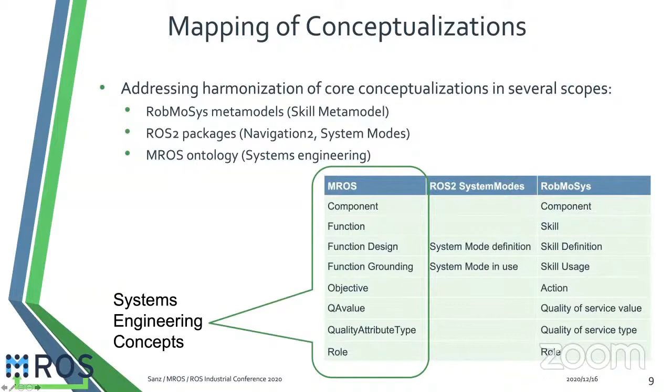Another part deals with the system, that in our case is a navigation system in ROS-2. And one part was the meta-control domain, the intermediate capability that provided the runtime adaptation needed to match the concrete realization of the system at runtime to the needs for the mission and the tasks to be performed.

Our framework provides several capabilities concerning concrete application, in our case navigation capabilities, also related to capabilities for system generation and adaptation at runtime, capabilities for runtime observation of system state and diagnosis, and capabilities for runtime adaptation and control of the realization of a concrete implementation.

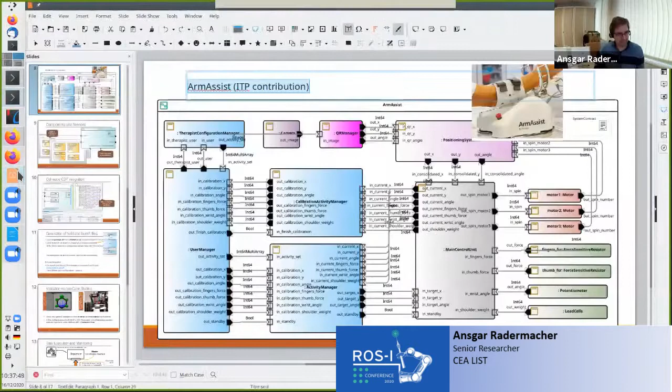Yes, thank you for the introduction. So I'm now sharing. Can you see my presentation? Perfect. Yes, so thank you for the introduction again.

So I will talk here about Papyrus for robotics, and the work presented here is principally the work of the CEA RobMoSys team, consisting also of Matteo, who will also present parts today, and Huascar Espinoza, and myself.

So why are we doing model-driven engineering? We are doing it because we observe that robotic software engineering is still, in many cases, a kind of craft. It's a bit less systematic and more ad hoc than in other domains.

And there are different incompatible component-based frameworks. With ROS, we are already a big step forward towards a framework that is very widely used. But there is still also a code-centric approach, so you're coding, you have some description files, but most parts of the application are still coded. And if different people are involved having different skills, there are no clear interfaces defined between these people.

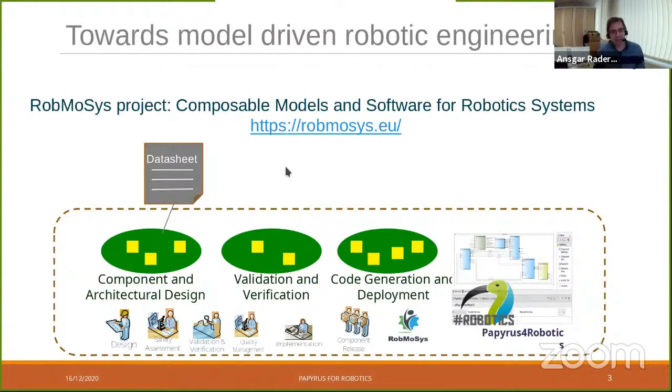And in order to really have something that runs in the end, you also need some code generation and deployment mechanisms. That is why we started to work on Papyrus for robotics. By the way, this work has already been supported by a ROSIN project called ROS-MDD, a focused technical project of ROSIN that enabled us to add ROS2 code generation to Papyrus for robotics. So what is Papyrus and Papyrus for robotics?

Some of you may already know Papyrus, which is an open source model-based engineering tool. It's integrated into Eclipse and it's based on standards, so we don't have proprietary non-compatible extensions, but a pure OMG UML standard and some OMG standardized extensions such as MARTE. But it is possible to customize the tool to address domain-specific concerns.

And that is what we have done with Papyrus for robotics. We did a customization for the robotics domain, aligned it with RobMoSys with respect to the modeling artifacts, and added tools for code generation that address specifically ROS tools. We also have some support for design time assessment of certain criteria, so you can specify some safety concerns and validate that.

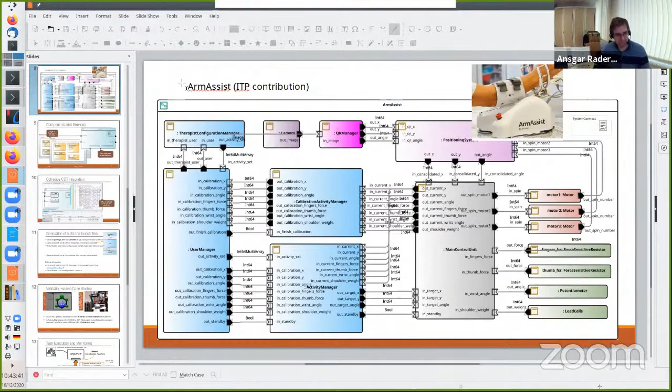We see your editing view now. Yeah, somehow dropped out of full screen. Okay, it's back in full screen. It's big. Don't know what happened.

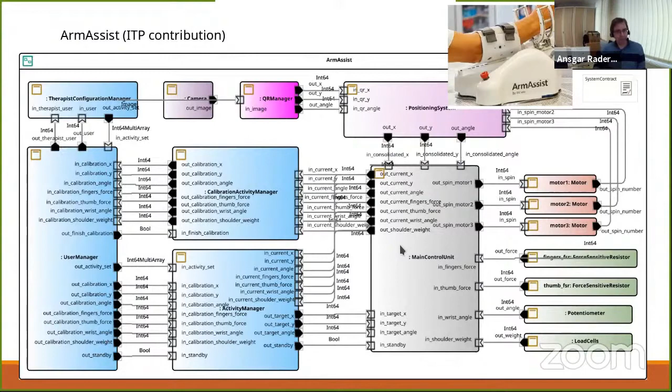This shows you that it's possible to also define some more complex systems with their tool, but I'm now returning to some very simple ones.

There's also a link with Eclipse CDT. So if you have modeled your component at one place at one moment, you need to write code that implements the callbacks, for instance, when you define here the port with the initial pose called initial pose that gets a pose and then needs to react on this pose information that it gets. So you need to write code at some moment, and we propose to do that with the CDT, the Eclipse integration of the C++ development tools.

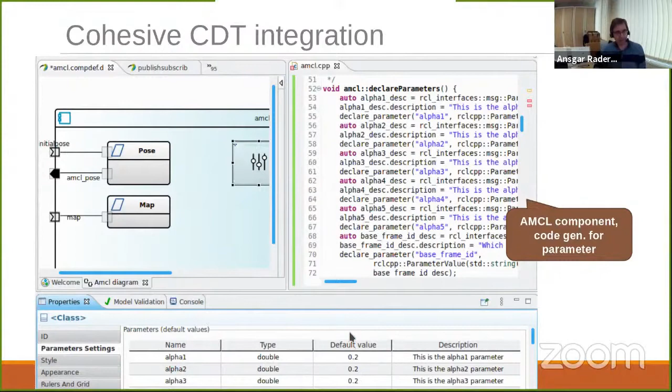For those that also want to change some of the model properties by editing the code, this is possible to some limited extent—you can, for instance, change the name or declare a parameter, and it will get updated in the model. If we have time, I can show that later on live.

We are not only generating code, but we are also generating the build files. So there is the package XML and the CMake list that you all know needs to be generated. We configure an Eclipse CDT project that is automatically configured for doing the Colcon build. We also generate launch scripts which contain suitable remappings.

Why is remapping needed? Because you might have some components that you are instantiating multiple times—for instance, a distance sensor, where you have two instances connecting to a controller, and you need to make sure that the information from the first instance goes to one port and that from the other distance sensor to another. So while we are reusing the same component, we need some reconfiguration through remappings to make sure the communication follows our model.

We also take care of parameter configuration. We generate YAML files in which a user can override some default parameter values specified on the model level. And for the generated launch script, we have generated a normal variant and one variant that automatically launches a component, which is quite useful for testing.

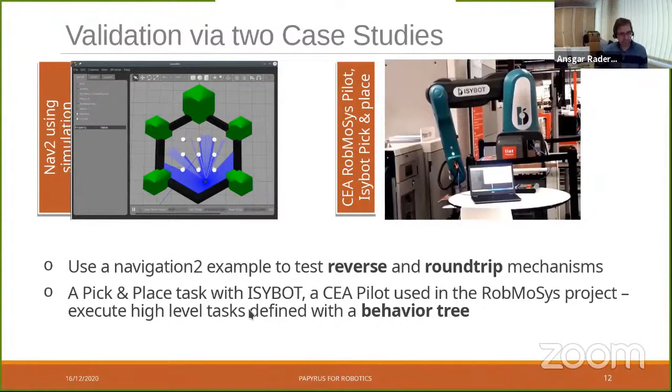In the context of ROS-MDE, we did a validation with two use cases. On one hand, we had a navigation use case which we executed in simulation. On the other, a pick and place application in which we used our ISYBOT. This was also a CEA pilot in the RobMoSys project. We had these two case studies to show that our reverse and round trip mechanisms work. With respect to the pick and place task, we particularly developed and evaluated the execution of a behavior tree.

So Matteo, I don't know if you want to say some words about the task execution and monitoring with a behavior tree. No? Okay, we will do that later.

You have principally a sequencer that coordinates and executes the behavior tree, using a coordination interface to control one or more components which correspond to ROS 2 actions that get called by the sequencer. We will show a video using this mechanism, because one of the interesting aspects is that you can see how the behavior tree is executed, and in which state it is at a certain moment.

There's another interesting aspect: you can define a hazard and risk analysis table and associate it with tasks and skills. A skill of a robot, for instance to do a certain movement or to open or close a gripper, has potential risk, and we associate this risk with a skill. Then we automatically get a list of relevant skills when we define such a behavior tree. At the leaves of this behavior tree, we have these basic skills that are executed by a robot.

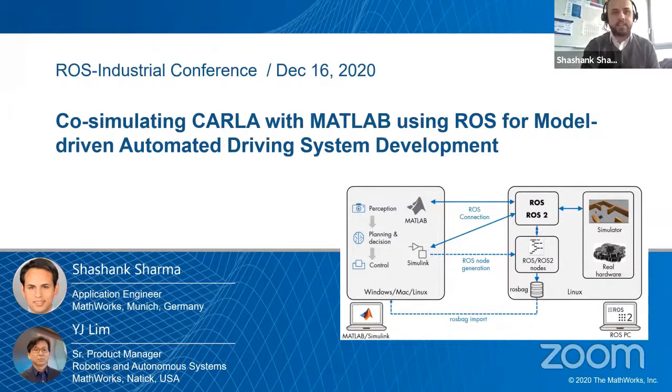Now let me start by talking about autonomous systems first. Autonomous systems may have a mix of multiple cycles of synchronous processing for more precision control, as well as asynchronous interfaces for communication of data and events for inter-process synchronization. Autonomous systems control may also require parallel or distributed processing, running on multi-core and GPU for high resolution and multi-rate sensor and perception processing, producing coordinated motion of multi-degree of freedom actuators. It's very complex. There have been several robotics frameworks proposing solutions to design and develop such distributed systems.

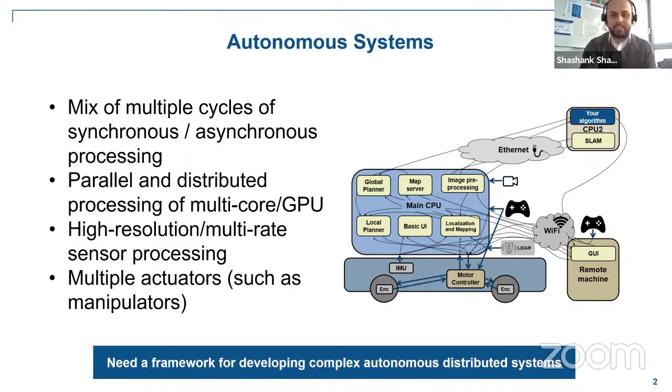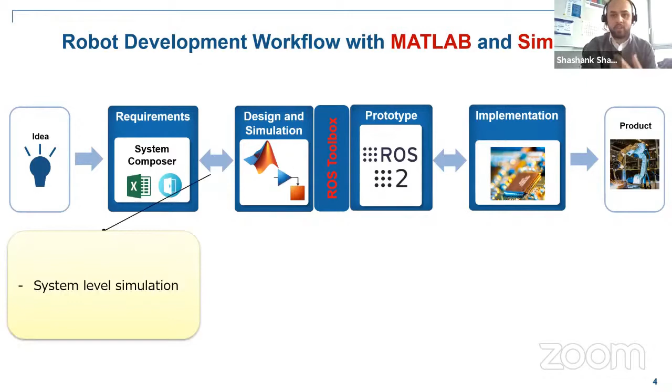Now, ROS is an enabling technology and quite popular one to develop such complex intelligent systems. With the given system design requirements, ROS provides a common framework to design, simulate, and prototype robotic applications. With ROS, you can also analyze log data, design algorithms with various handwritten codes, and visualize and debug your results. You may need to rewrite source code for production, though. By connecting Matlab and Simulink with ROS, it allows you to perform system-level simulation with requirement traceability. It also provides rapid and iterative design processes with many of the tools Matlab and Simulink has for autonomous systems. You can also generate certifiable code for production, not just C++ code. You can also, if needed, generate HDL code out of Matlab and Simulink for deployment on more energy friendly hardware resources. I will not delve into those details.

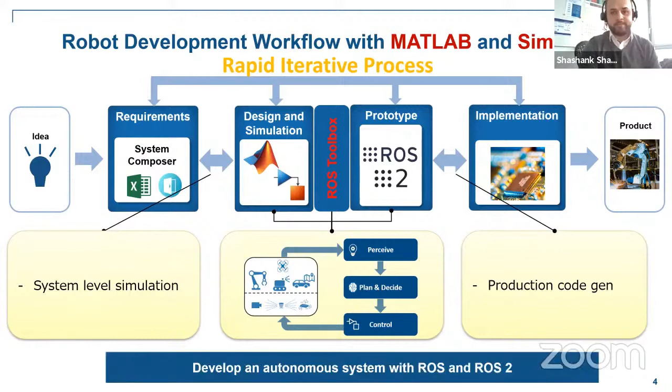Today's focus is how we bridge ROS with Matlab and Simulink for an application related to autonomous driving. Now let's see our agenda first. I will begin by giving a brief overview of ROS and ROS2 workflow with Matlab and Simulink. Then I will go into details about co-simulating Carla with Matlab and Simulink using ROS. I will talk about autonomous driving systems development in this context, and then briefly talk about what is possible beyond co-simulation and summarize our talk today.

Let's go into the first part, how the ROS and ROS2 workflows look in combination with Matlab and Simulink. Some of you might remember this was the core of my talk in last year's ROS Industrial Conference in Stuttgart, and today I'll give a brief one-slide summary of that topic. If you're interested in knowing more about these workflows, feel free to contact me. Alternatively, there's also a YouTube video from ROS Industrial from last year's conference. On the right-hand side, there's a traditional ROS-enabled system with a host of ROS-enabled simulators or hardware, and nodes that enable autonomy, visualization, and so on. On the left-hand side, Matlab and Simulink offer tools for autonomous systems development. Some of you might be familiar with our tools - Simulink, Stateflow, Matlab - used widely for such purposes. For autonomous systems development, systems should have functional components of sensing, perception, planning, and control. Now we have a tighter bridge to ROS from Matlab and Simulink. There are three workflows for how we can connect Matlab and Simulink to ROS.

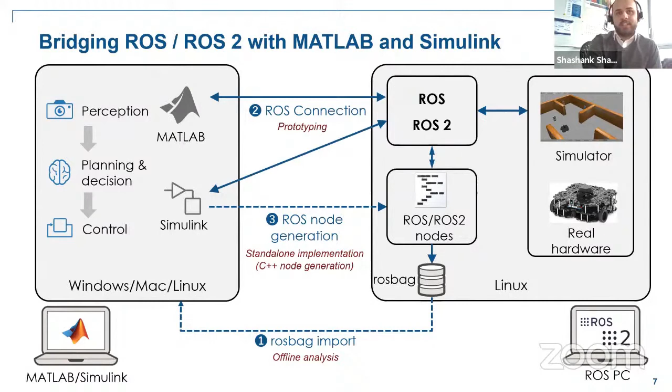Now, coming to my next topic, let me talk about how we can co-simulate Carla with Matlab using ROS. In this respect, let me first talk about 3D simulation for automated driving in particular.

As you know, autonomous driving is very similar but slightly more complex compared to, say, mobile robotics development. There's also a safety-critical factor involved and lots of regulations, plus interaction with vulnerable users such as pedestrians, cyclists, etc. So in order to test complex algorithms, there's a very strong need to virtually validate those scenes.

You also need to have an environment where you can realistically test and gain confidence in your algorithms before you go out into proving grounds or into real-world situations.

Such a 3D simulation requires modeling sensors, visualizing vehicles as well as other vulnerable road users. You can generate and record synthetic data and simulate scenes. There's also a need to programmatically create scenes and scenarios in order to cover a large solution space that might or might not be possible through real-world testing.

In this regard, MathWorks already offers a complete solution involving 3D simulation and modeling sensors. However, a lot of people working on these problems do not rely on a single tool, and rightly so. Autonomous driving is a really complex application, and for that you need more than one tool, maybe during different stages of development, and tools that can interact and interoperate with each other.

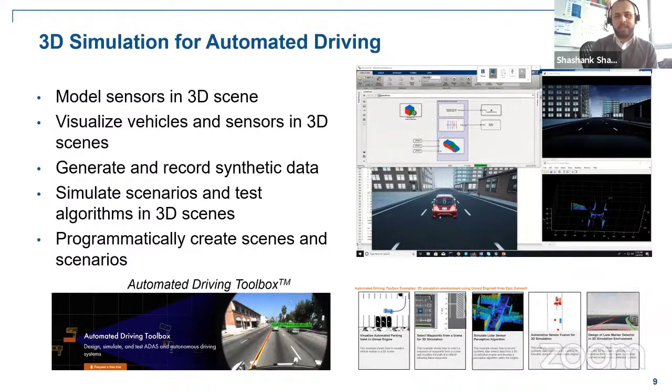Many MathWorks customers like to use our solutions at some point in time, and they would want to use parts of those solutions with other tools, which also includes ROS-based code or maybe tools like Carla at some other point in time. So that means interoperability plays a very important part in the whole process of autonomous driving.

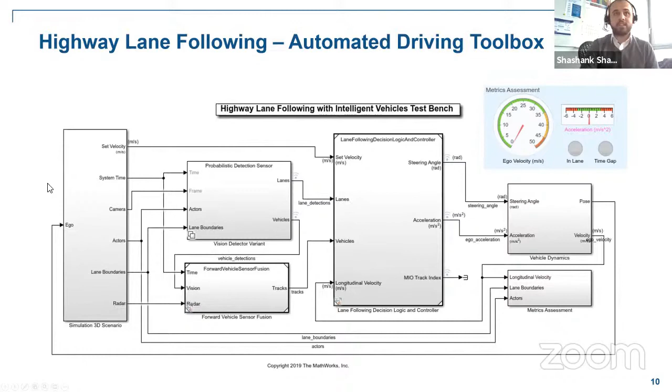This is a Simulink model, or a system model of the whole example. We have parts for perception, planning, and control implemented in Matlab and Simulink - vision and perception, sensor fusion between camera and radar models, a planning and controls module, and also a vehicle dynamics module.

One of the most important parts we just discussed is the scenario component, where you have a static scene environment, vehicles, actors, and other sensors, and together all these components constitute a scenario. In an ideal world, MathWorks offers all these components if you want to use them.

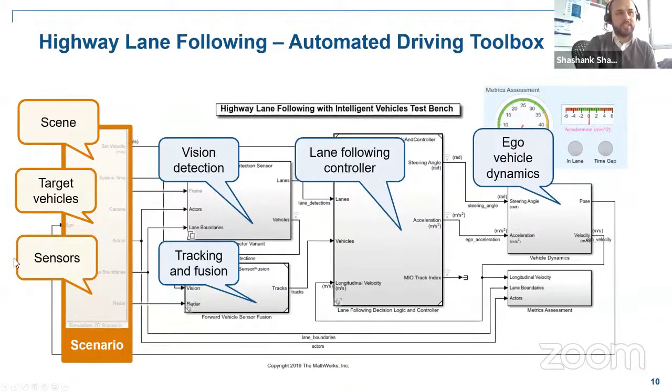However, a lot of our customers use either scenarios with different simulation environments, or they have parts of code written in Simulink and Matlab, and parts written in C and C++ integrated into Simulink. So I'd like to focus today on the part related to scenario-based testing, how we do it inside MathWorks, and then how we do it with Carla using ROS-Bridge. A brief example of how that simulation could look is in the slide.

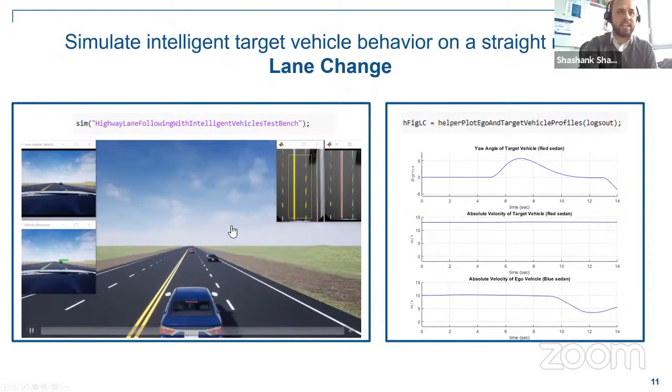So here we are co-simulating with Unreal Engine directly. If I click on the video, we see a highway lane change maneuver where we have an ego vehicle in blue, and a red sedan that is cutting off. On the right-hand side, when we record those signals and replay, we can analyze a lot of things, such as the yaw angle of the target vehicle, the red sedan, and how our absolute velocity changes as the red vehicle cuts in. This is helpful for analysis or virtual testing.

Then there is another example of the same algorithm in a different scenario, testing in different settings like lane following on a curved road. If there is a strong cut-in maneuver with a vehicle, and you have safety requirements of maintaining a safe distance, then how would your algorithm react? These kinds of virtual environments give you a very good overview of how your solution performs in the real world.

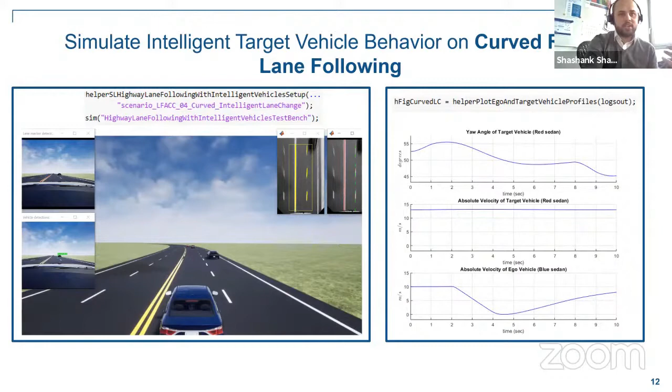Now, based on everything I talked about regarding scenario-based testing, I will now talk about Carla, because Carla is one of the most popular open source simulators for autonomous driving. It is also based on Unreal Engine 4, so the scenes or scenarios in Carla look very similar to what I just showed. It involves a rich 3D environment, and also imports semantic information from OpenDrive, which is again a standard for defining roads and static environments.

This enables you to create a very rich 3D environment to test driving proficiency in realistic driving simulation. Carla is an open source tool, but it is strongly funded by companies like Intel and Toyota, and they're also learning from the best in the open source community due to being part of the OpenCV Foundation.

In my personal experience, one of the reasons why Carla is so popular is because it has good support with ROS for co-simulation. Due to that, a lot of people working on autonomous driving development start in ROS, which is also a very common tool used in the same environment, and maybe start early prototyping in Gazebo or in tools like Matlab. Then when they have a need for a non-production but very high 3D environment, they switch to Carla because it's really easy to do so if you're working in a ROS-related environment. This makes it really popular for autonomous driving 3D scenario-based testing.

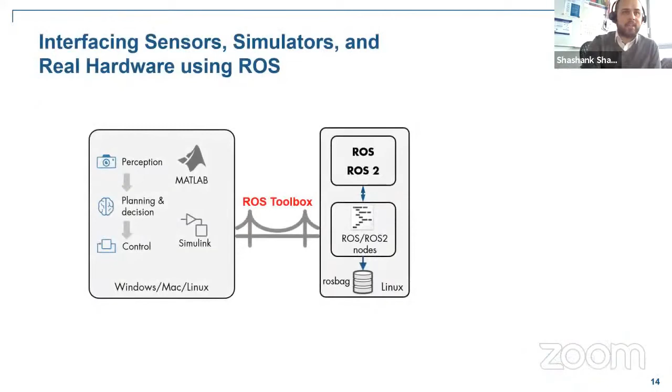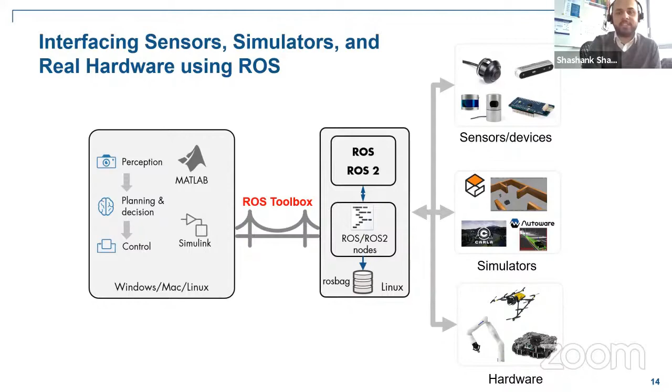Now, I talked about how Matlab and ROS interact using ROS Toolbox, and how ROS has a very good connection with different sensors, simulators, and hardware. If we take this concept, Carla has good support with ROS, so these two bridges enable us to interact with Carla using ROS as the communication platform. The communication between ROS and Carla happens with the help of the ROS-Carla bridge.

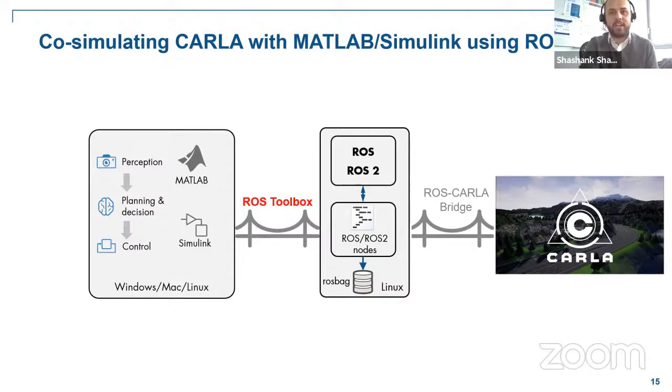First, we would need to subscribe to specific nodes of ROS by using ROS Toolbox inside Simulink and Matlab, and publish all of the changes using the publisher block inside Simulink. This cycle continues, going back to Carla. With this, we leverage the best of both worlds.

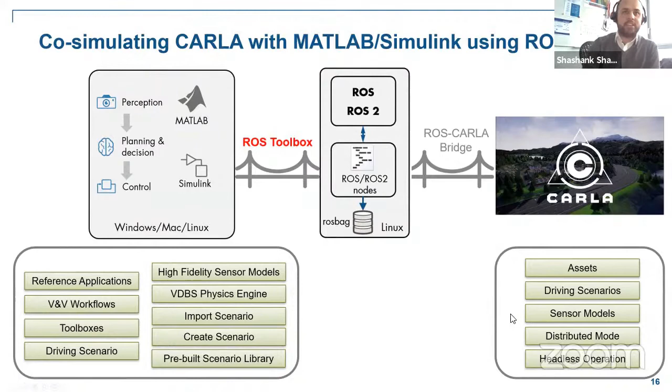In MathWorks, we have a lot of reference applications, specialized tools for perception, planning and control, lots of V&V workflows, and very strong vehicle modeling. You can also create custom sensor models. Going to Carla, Carla has very good assets, very good driving scenarios, sensor models, and can work in distributed mode as well. You can programmatically change a lot of scenes and do a lot of scenario-based testing. So together, using ROS, it's a very good use case for co-simulation.

So I will talk about some of the steps and try to show some videos in this regard. First is the lane detection and following. On the left-hand side, you see some images from Carla.

We get semantic segmentation images from Carla as well as RGB images, and process them inside Matlab to look for pixels in black and white. Based on that, we can calculate the slope with respect to vehicles and straight edges, and compute some splines. By collecting these slopes and steering angle history, we can predict how much steer we need, then draw and fit those splines to steer the vehicles.

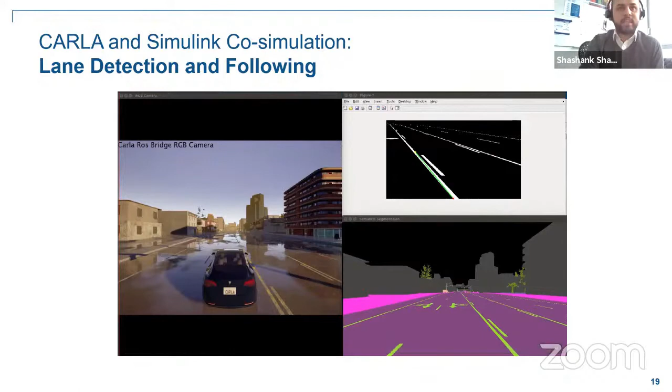I have a video which might not run, I ran into trouble at the last moment. In the video, I meant to show how the steering maneuver looks like. On the left-hand side, this image is generated in Carla, and the semantic segmentation corresponding image is also generated in Carla from the camera, but this processed image is being generated in Matlab as the video runs. I wanted to show you in the video how this looks in the process, but I ran into last moment troubles with the video.

I have another example where I talk about the LiDAR processing. The original image is obtained from Carla, but later on we can prune the LiDAR image, remove some point clouds, do ground plane removal, and do some clustering inside Matlab.

I have another example where on the bottom right we have a video from Carla, and we are doing segmentation, clustering of the image, ground plane removal. We are clustering and then putting bounding box images on those LiDAR point clouds. As you can see, as the vehicle moves, you can see how we process those images and point clouds in Matlab as we run a scenario in Carla.

This process can be even more accelerated by generating code for the LiDAR processing algorithms as C++ code, and you can also deploy that as a ROS node later on, in order to achieve a bit more faster processing.

As I mentioned, the live connection with Carla uses a live instance of Matlab to analyze and iterate through your algorithm, but later on these algorithms can also be deployed as ROS nodes for faster processing. That interacts very well with this ROS communication model, and Matlab can support code generation to that.

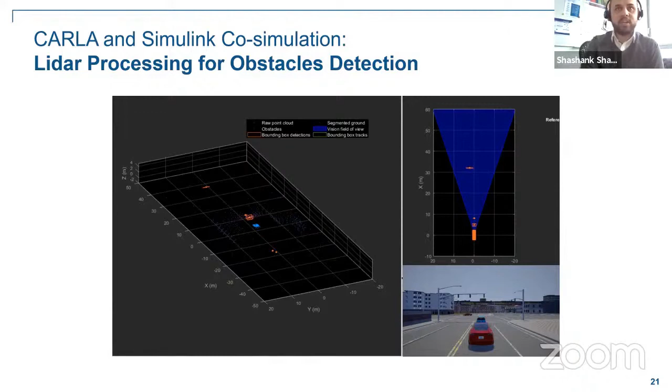I would like to talk about some of the other things that are possible beyond co-simulation. Another thing that works with Carla is how to generate the environments. For that, we also offer Roadrunner as a product, which works with a large variety of simulators, and actually Carla mentions Roadrunner as a tool of choice in their documentation.

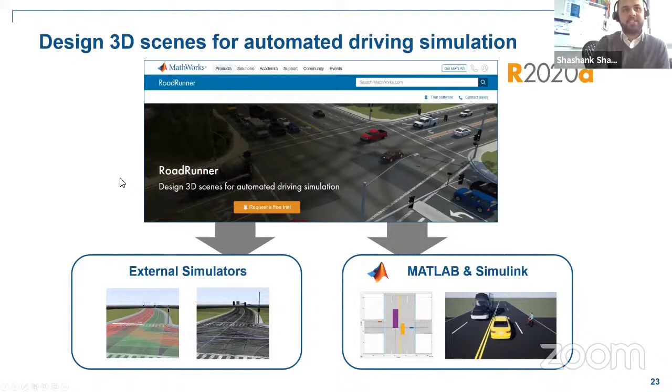If you are working with other simulators which are ROS-based, such as LG SVL, there is a similar workflow we can also support. So in the end, we can leverage the strength of each of the environments.

Using Carla's strengths to have a different variety of assets, scenarios, working with APIs to create very strong 3D scenarios for autonomous driving, and using MathWorks strengths to have reference applications, V&V workflows, scene creation, and using ROS as a communication layer, and also deploy code later on to ROS. We can leverage both environments and use ROS as a middleware network.

This workflow is also not just limited to Carla, but to other simulation environments as well. As I already mentioned, for Gazebo we have a direct co-simulation environment, one of the best co-simulation support. But if you're talking about autonomous driving and different simulators that connect with ROS, we can support those applications as well.